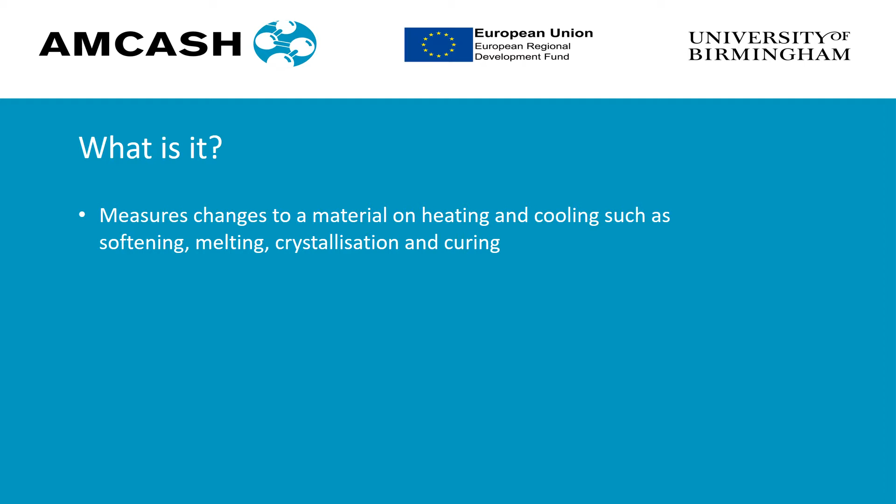In basic terms, DSC measures the changes to material on heating and cooling, such as softening, melting, crystallization, and curing. This can be used to determine the temperature at which changes occur, the energy involved, and also the crystallinity of material.

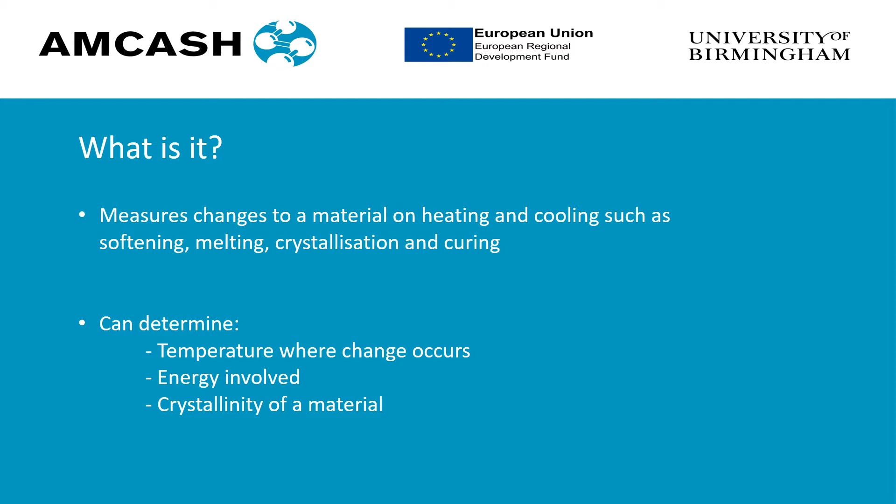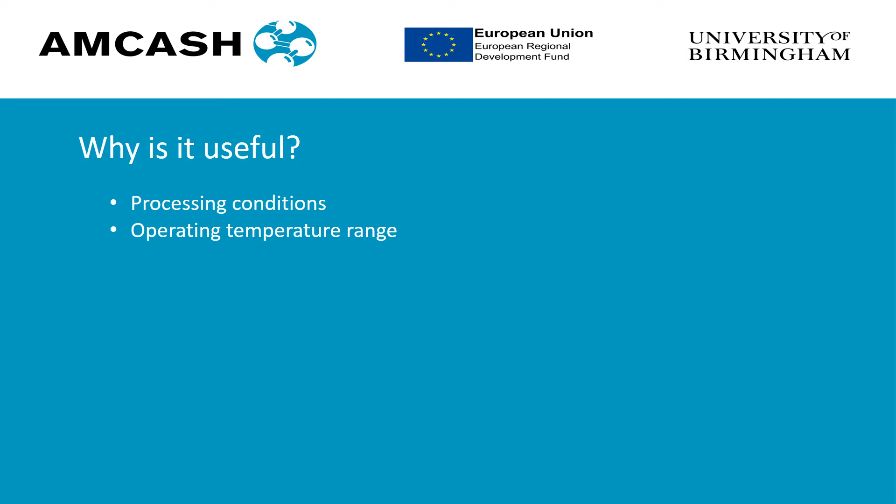So why is this information useful and how can it be used to help your business? Well, firstly, if we know the softening or melting point of a plastic, we can use this information to determine the optimum processing conditions to use. This ensures that the material is fully liquefied, but that elevated temperatures aren't required. In addition, if a material is going to be used within a set temperature range, we can determine that it's thermally stable throughout this process.

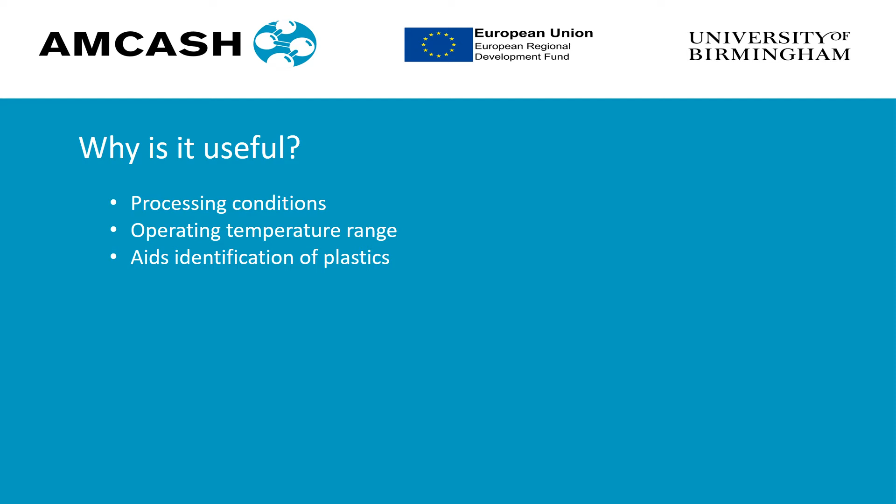DSC can also be used to aid identification of plastics. Different plastics will have different melting points and glass transition temperatures, and through this we can determine which material is present. Crystallinity is an important parameter that we can determine by DSC as it impacts on the mechanical properties of material. In addition, we can look at the crystallization kinetics to determine how you can alter your process to control the crystallinity.

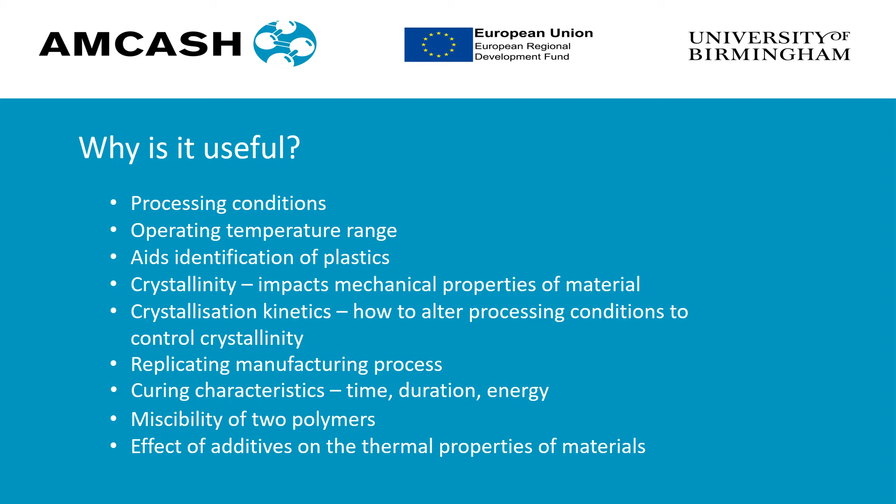We can also replicate the manufacturing process. For example, if multiple heating and cooling steps occur, we can use this to determine the crystallinity that will be produced in the final material. We can also look at the curing characteristics, for example, the time, duration, and energy. In addition, we can look at the miscibility of two polymers and also the effect of additives on the thermal properties of a material.

When a thermal transition happens, such as melting, energy is required. This reduces the temperature increase of the sample, and as a result, more energy must be supplied. The DSC measures the difference in the heat flow to the sample and reference and uses this to monitor transitions.

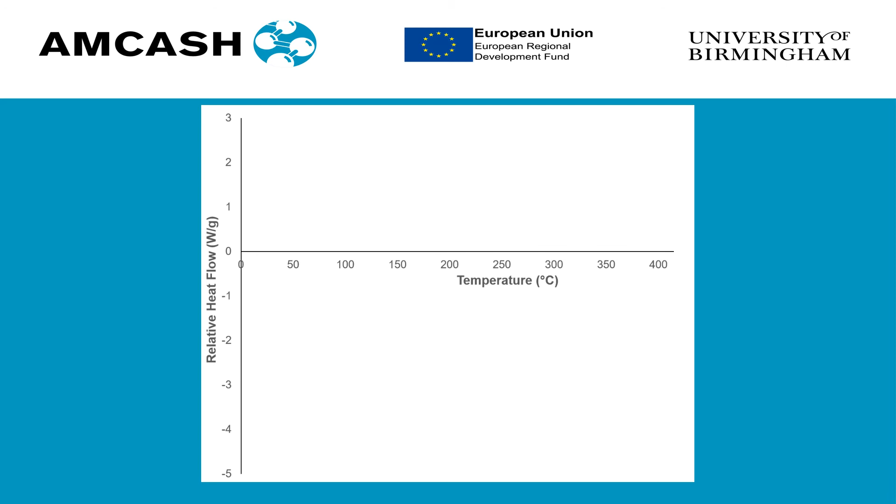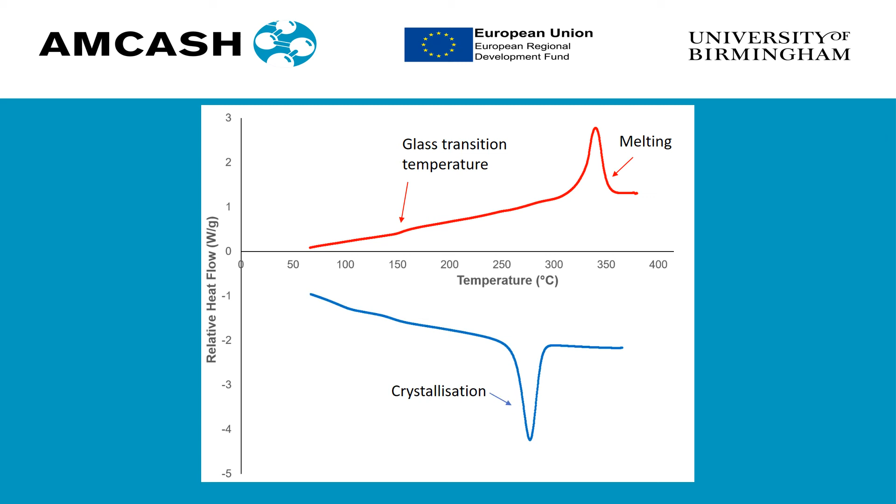A typical example of an experiment can be seen on this graph. As we heat the sample, we can see the glass transition temperature and the melting point, and can determine the temperature of each of these transitions. As the sample is cooled, we can then see the crystallization point. If we take the area of the melting peak, we can then determine the crystallinity of our sample.

In the AMCASH project, we have two different DSCs. The first is the Mettler-Toledo DSC1. This can perform over a temperature range of -80 degrees up to 450 degrees. It performs both heating and cooling cycles at a rate up to about 50 degrees per minute. The sample we use is typically between 3 and 10 milligrams.

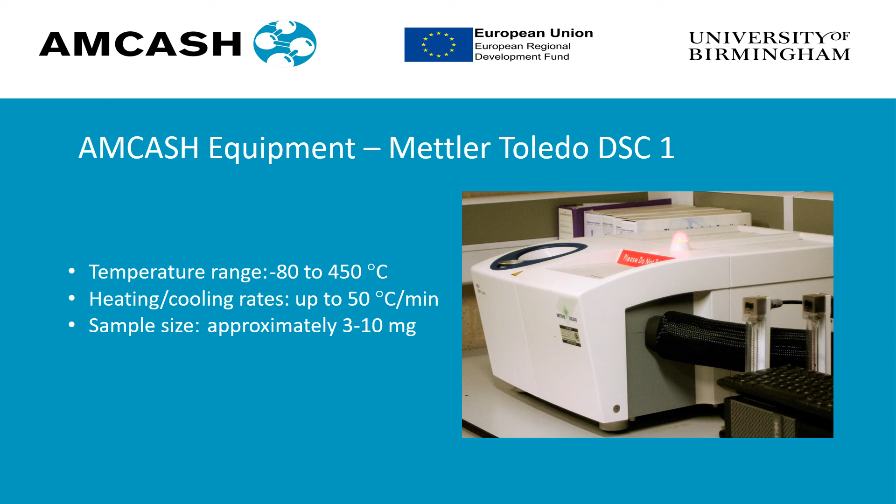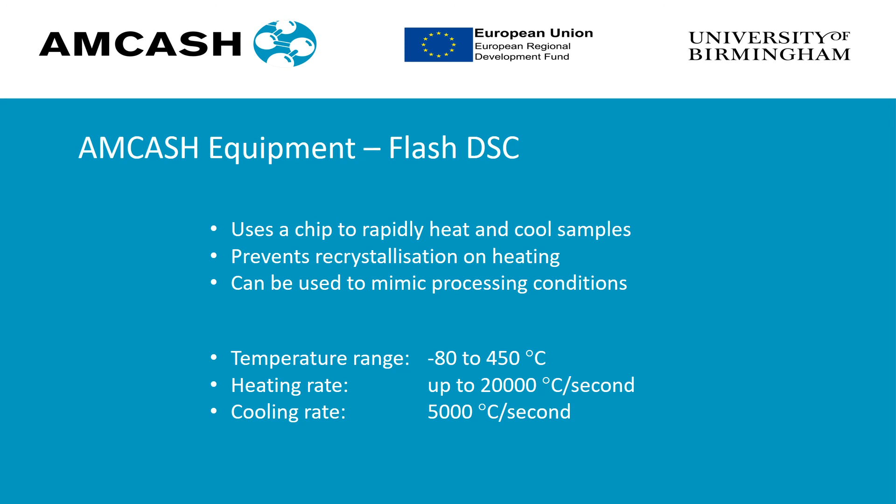We also have a flash DSC. This uses a chip to rapidly heat and cool the samples, and this prevents recrystallization on heating, producing a more accurate result of the material present. It can also be used to mimic processing conditions. The flash DSC can operate at a temperature range between -80 degrees C and 450 degrees C, has a heating rate of up to 20,000 degrees per second and a cooling rate of about 5,000 degrees per second.